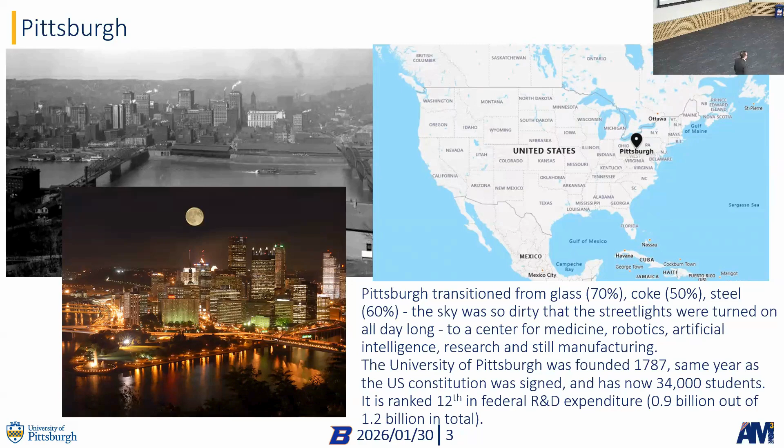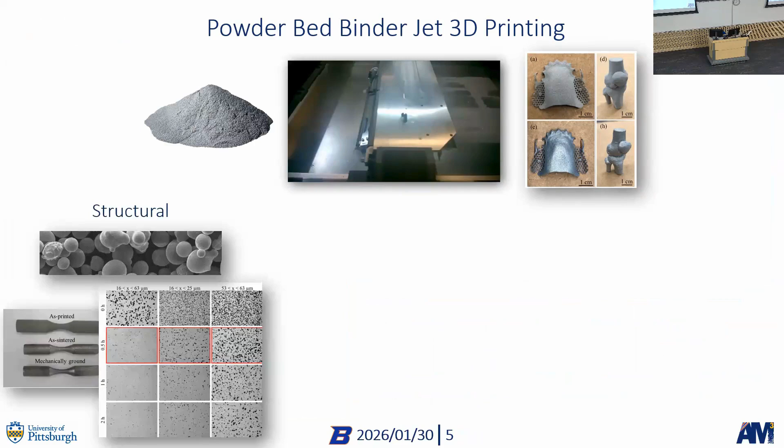Okay, so today in my talk, I will give you a brief overview of Binder Jet 3D printing. I'm splitting that talk up a little bit into structural materials, then I will also talk about functional materials. And finally, I will talk about a project that came out of experiences that we had with binder jetting and some fairly recent occurrences in this country and in the world. That is on porous binder jetted structures.

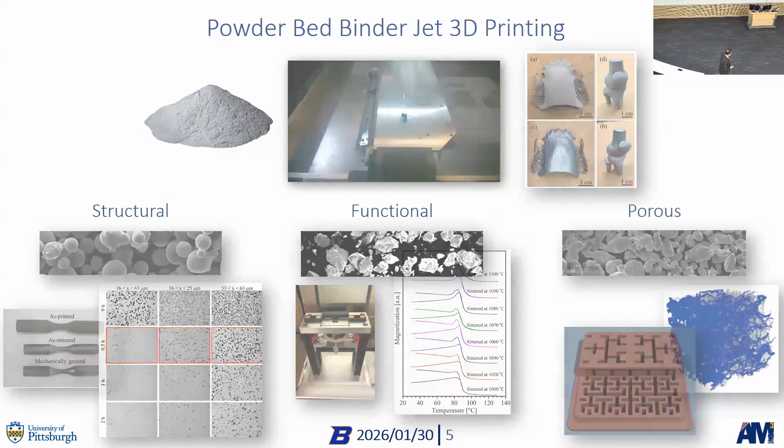So what is binder jet 3D printing, or short binder jetting, right? When you look at the landscape of additive manufacturing, how I like to usually structure and categorize it is: do we have a method that can print metal parts directly, or do these methods only print them indirectly? For example, you make a shape and then pour metal in it or something like that, right?

So when you look at the methods of additive manufacturing, you see VAT polymerization, which is fairly common. You can actually buy these printers now for like $1,000 or something like that. There's material jetting, which you have here in the department. There's material extrusion, which is probably the most common additive manufacturing method for amateurs, right? And that is FDM printers. You can buy them for $150.

And then on the other side, we have directed energy deposition, powder bed fusion, sheet lamination. Those are all methods that can actually print or additively manufacture metal parts. And then there's the odd one in the middle, which is binder jetting. In binder jetting, you can actually print metal parts directly, or you can print sand molds and then use them for sand casting. That is actually the biggest business for binder jetting - printing sand casts.

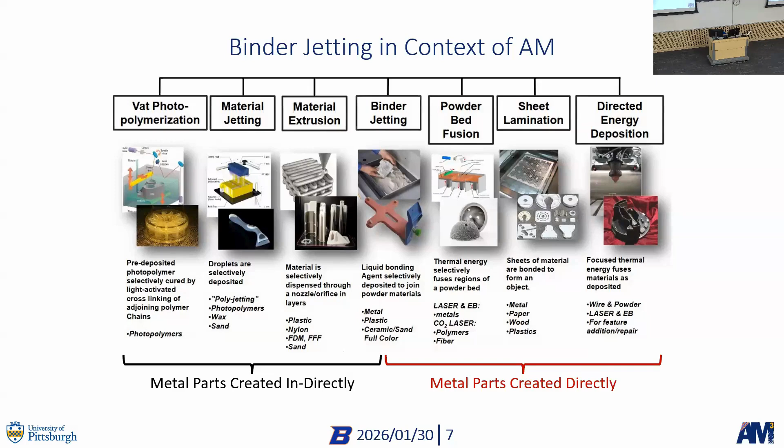Companies that do metal casting actually were able to reduce their development time for parts from a year or two per part redesign to several weeks, right? So it's a huge, huge impact on the metal casting industry.

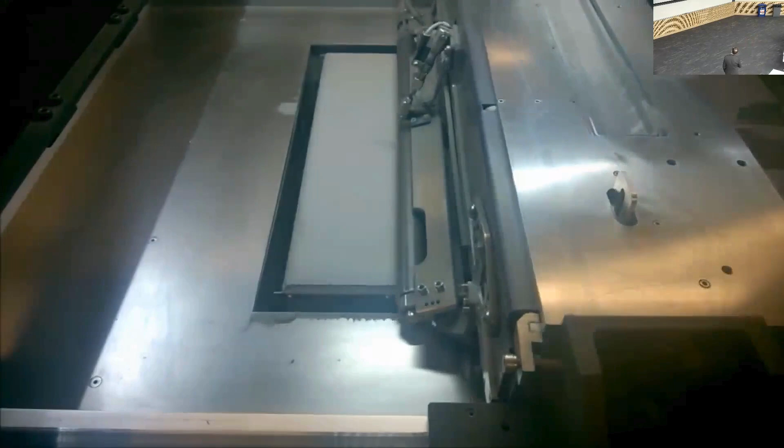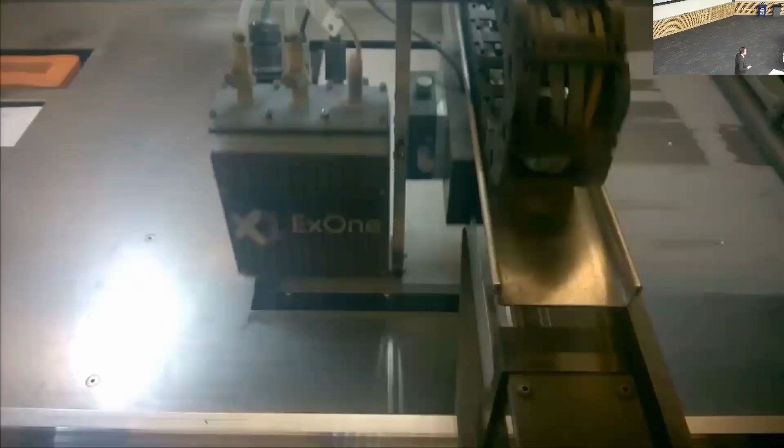So how does binder jetting actually work? What we're doing here is we are laying down a layer of metal powder. We roll it, make it flat. And then in the next step, we are bringing over an inkjet cartridge that you can see here. It's basically like your inkjet printer, but instead of ink, we are printing a glue, right? A binder that is binding particles together in very specific regions that are defined on a 3D model.

And then we are drying this binder briefly to evaporate either a solvent or water, depending on what binder you have. And then after this, you consolidate, you cure the binder and are able to take out your part, and then need to do a high temperature heat treatment.

This high temperature heat treatment is needed because after printing and curing, we have a part that's very chalk-like. So if you have this in your hands, you can actually rub off the powder. It is fairly stable, you can drop it from shallow heights, but the problem is it will just break if you put pressure on it, right?

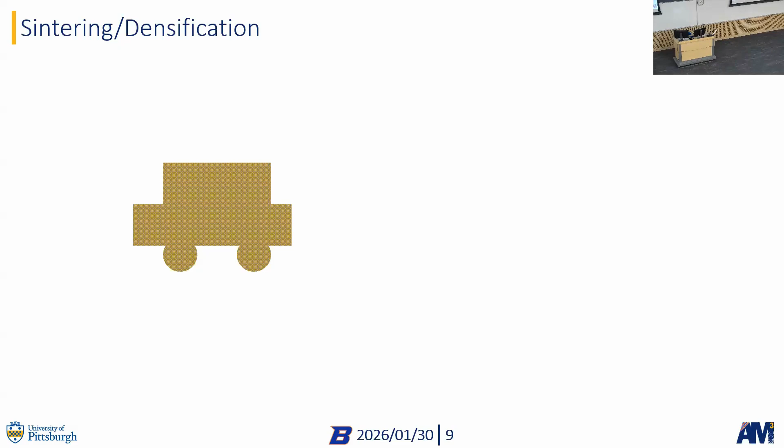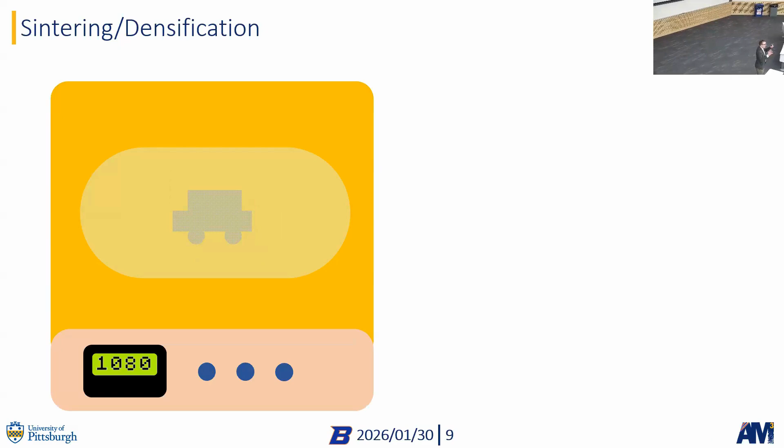So in the high temperature heat treatment, we are applying a temperature that is fairly close to melting point. We densify our material. Since there's a lot of porosity in the as-printed part, it actually shrinks, right? And as I already mentioned, we need to be very close to the liquidus line here to densify quite a bit. But how does this densification actually work?

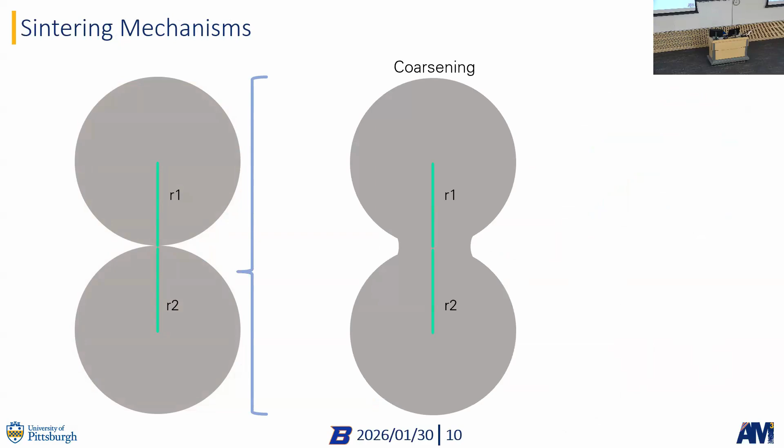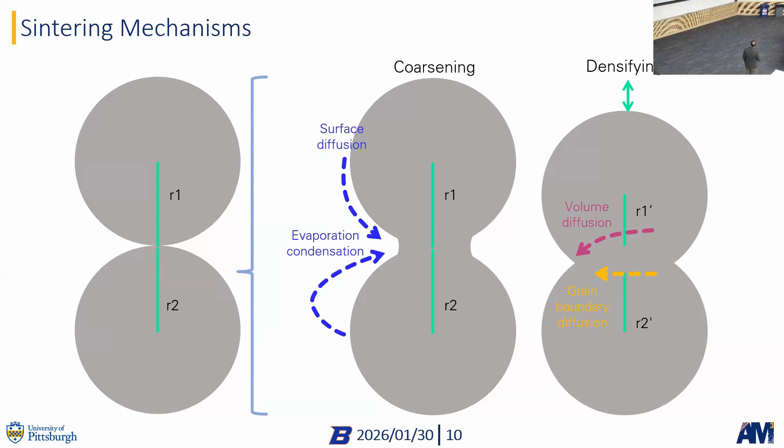So if we're looking at our sintering process, initially we have just powder particles that are next to each other. They are touching a little bit, right? During the sintering process, we first have a coarsening step where we have necking starting between those powder particles, through surface diffusion and evaporation condensation. And then we have the densification step as well, where we have volume diffusion and grain boundary diffusion as the mechanisms of densification.

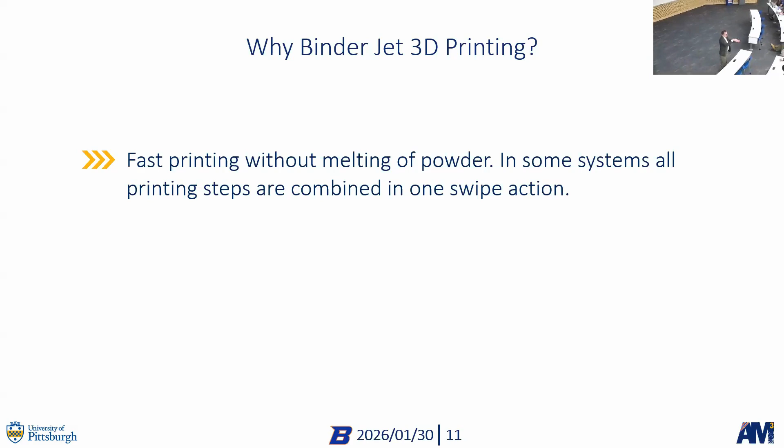So why would we even do binder jet 3D printing? I mean, you need to do this weird sintering process, that's another step, very time consuming. But on the other hand, you can print extremely fast. If you know laser powder bed fusion, you have one laser or maybe two lasers, and it takes a minute or two for each layer to actually print. Here, modern systems can actually do the entire single layer in one swoop. So you have powder deposition, directly behind it printing, and directly behind it drying. So the process is about 100 to 200 times faster than laser powder bed fusion.

We have no residual stresses during printing because there's no melting. That is really good, especially for materials that don't weld well. So if you have materials that don't weld, binder jetting is really something for you. But on the other hand, you need the post-processing - you need sintering for densification. In powder metallurgy, and in Pennsylvania there's a large amount of powder metallurgy companies, you need to do this as well. So this process is actually well understood in the industry, how to densify and sinter things from a powder.

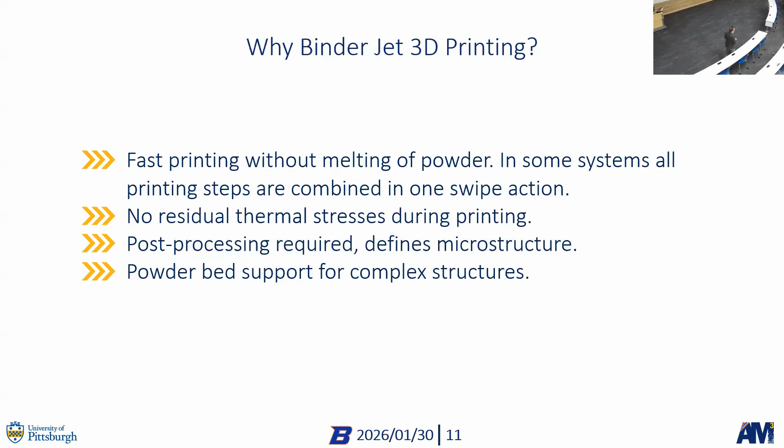And since we have a powder bed throughout the build, we can actually build really complex structures with overhanging parts, flat parts over the entire layer, and they will not sag down or anything during printing, like in laser powder bed fusion, for example.

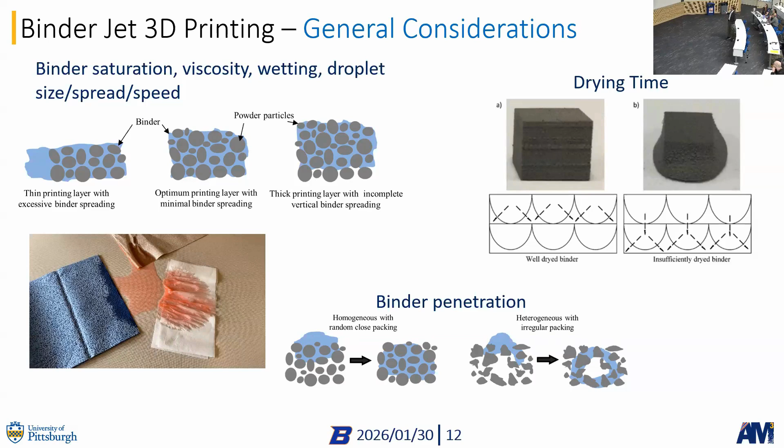So there's a lot that needs to be still considered. Doing binder jet 3D printing, we have an interaction between the powder particles and the binder that you're using to glue these powder particles together. If you look at this little video that I took, this is basically a binder, and here we have different cellulose that you can think of as different powders. What you can see is the binder is seeping into one of these much more than the other two, and that is the same in actually powder. Depending on what kind of powder and binder you have, the powder-binder interaction can be very different. You need to understand how this interaction takes place, how far your binder actually leaks in, whether you'll have nice shapes or binder bleeding in your parts.

You need to consider powder flowability, because if you have very sticky powder, like very fine powdered sugar, then it sticks. If you have granular sugar, then it flows really well. So in binder jetting, it is always better to have flowing powder. You can also get around with non-flowing powder, but that's a different story. You need to look into what is the shape of your powders, does the powder have porosity. And then you need to think about, doing printing, how thick are my layers with respect to maybe the powder size. How fast do I spread the powder? How do I tap it? There's a lot of considerations during the printing aspect as well.

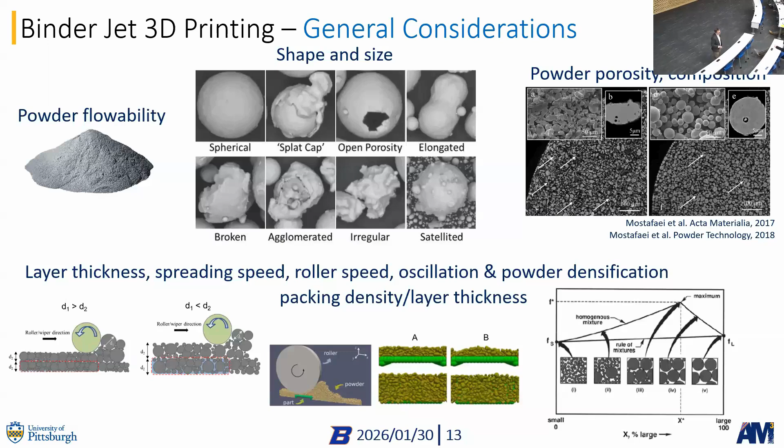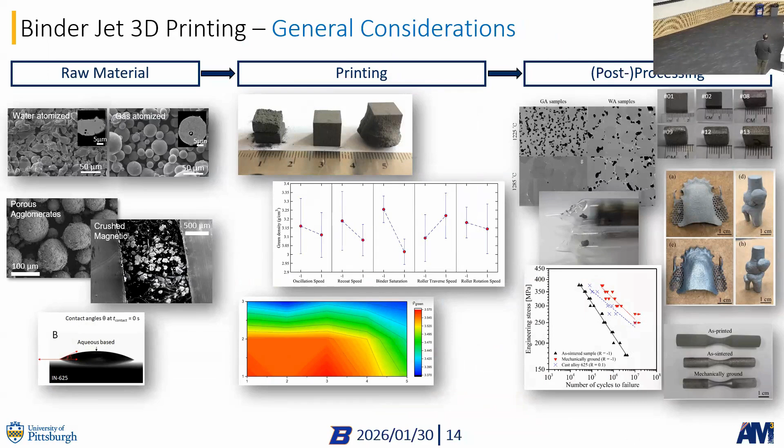So what we learned so far is we need to consider the raw material, powder and binder, and how they interact. We need to print and check how my print parameters affect my printed parts. And then finally, we need to do post-processing, which means sintering and densification.

So now that you're all expert on binder jet 3D printing, I will talk a little bit about structural materials. What do structural materials have in common? What do they need to be usually? They need to be very strong, and in order to be very strong, they need to be fairly dense as well. So for structural materials, that is usually the goal - we want to have very dense materials.

So we started with binder jet 3D printing now over 10 years ago. And the first project that we had was actually looking at, can we use cheaper powder than gas atomized powder? Gas atomized powder is really nice, spherical, flows super well, but it's very expensive. Water atomized powder, not so good - it's not spherical, doesn't flow very well, has contamination and so on. But for industry it's very interesting because it's much cheaper. So we wanted to figure out what's actually the difference between the two, and can we use them in binder jet printing independently?

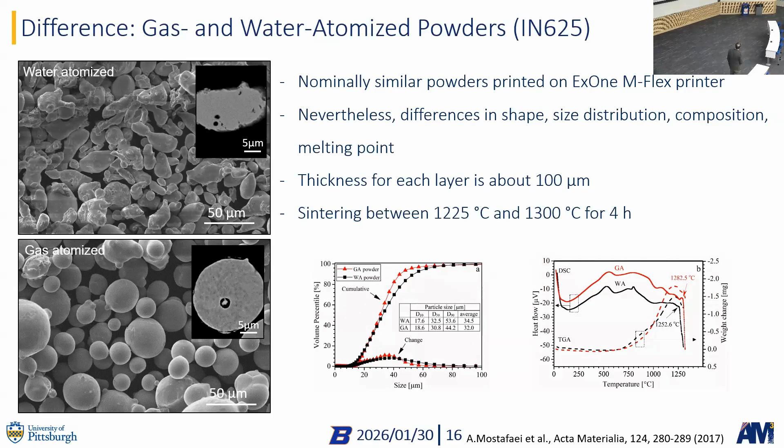So we did a sintering study. We heated our materials up to the same temperatures, and then looked at how they actually densify. So we saw that in gas atomized powder, which is the spherical one, we see really nice densification up to nearly 100%.

In water atomized powders, we didn't see that full densification—we only got to about 95%. What was interesting to me at the time, being extremely naive, is that this translates directly into mechanical properties. At the points where we have highest density, that's where we had the best mechanical properties as well. And even though we might not be fully dense, we can still, after sintering, age our material to change the properties of these metals. We can make them a little harder, increase UTS, which results in less ductility, but we can still modify through aging after sintering.

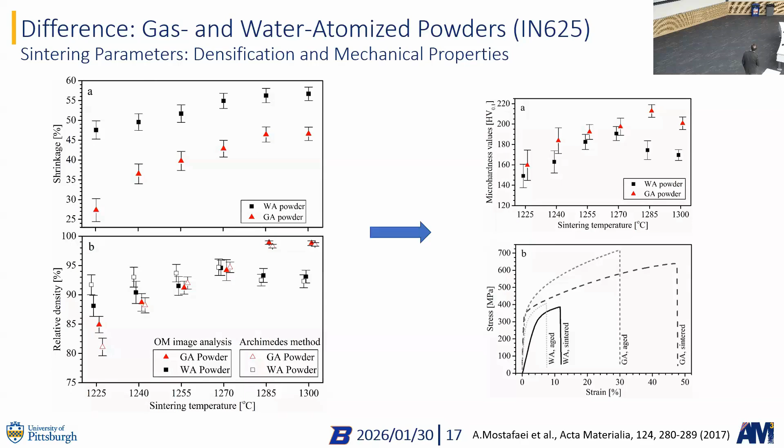As I mentioned, we were very naive in the beginning, so we just followed the printing parameters that the binder jet printer manufacturer gave us for these materials. That's usually a bad idea, okay? Don't do that. It's a good first step, but then you need to actually figure it out yourself.

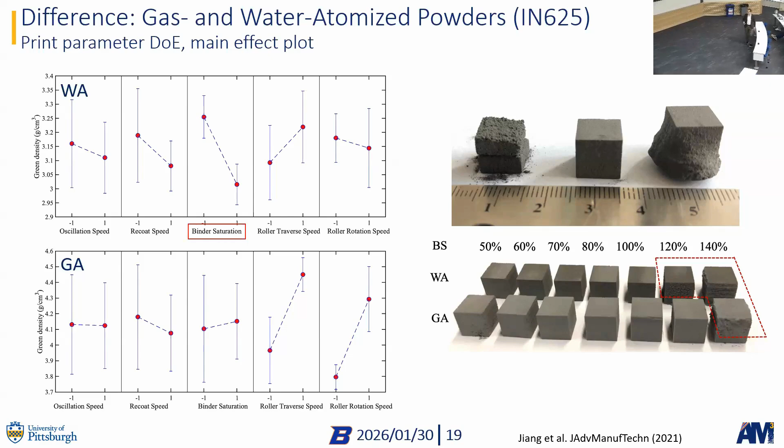So here we looked at the green density, as-printed density, and also density after sintering. What we could see right away is that the green density really translates into the sintered density—the higher your green density, the higher your sintered density. And as we saw before, sintered density also results in the mechanical properties. So whenever our green density was highest, sintered density was highest, mechanical properties were the highest. So what you can learn here is: the better you print your material, the better your final mechanical behavior.

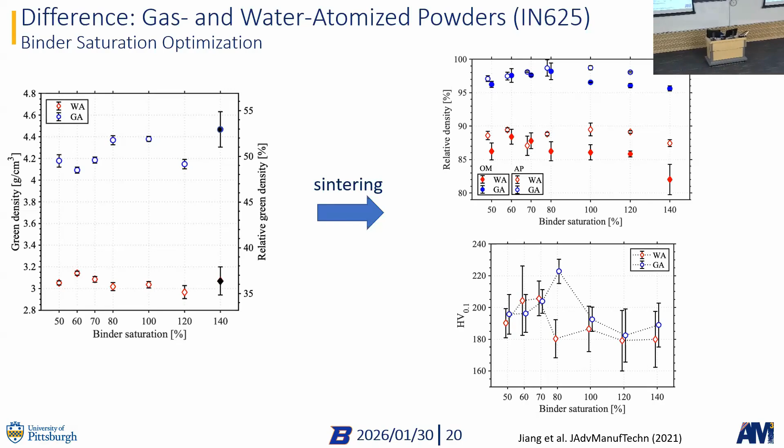So we wanted to learn more. We employed hundreds and hundreds of undergraduate students to cut and polish tens of thousands of samples—well, not that many, but many, many samples across different powder size distributions, different sintering temperatures, and different sintering times. What we wanted to learn is what is actually the densification or sintering mechanism taking place during sintering. With these different sintering times and temperatures, we figured out that at the highest temperature we have grain boundary diffusion, at the intermediate temperature we have volume diffusion and grain boundary diffusion, and at the lowest temperature, the defects are probably affecting densification so much that there's no clear diffusion or densification process present.

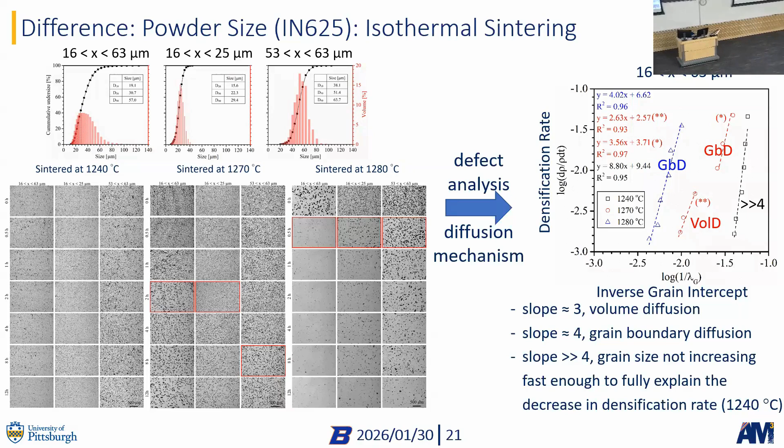So you saw in these previous pictures, if you looked really closely, that there were lines in some of them—these are print defects. If you have a powder, especially a light powder, smaller powder size, maybe lower density powder, then you imprint defects each layer. We wanted to see if this is actually real or just an artifact of the 2D microstructure. So we did microcomputed tomography and saw that no, this is actually real—it's throughout the structure, and this can be a problem. If we need to print small particle powder or light powder, then we need to fix this.

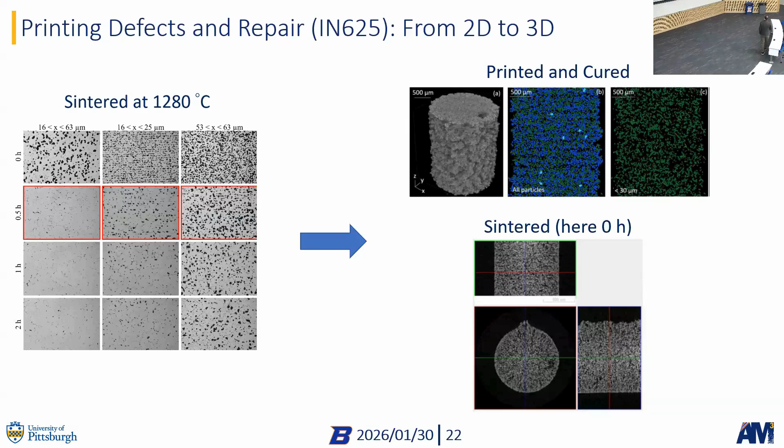So one thing we did is we looked into using supersolidus liquid phase sintering, going just a tick into the region where we have a liquid phase forming. We don't do this very long, just for a brief moment to form this liquid. The liquid is formed on the particles, coating them and helping the densification process quite a bit. By doing so, compared to solid state sintering, we can reach with supersolidus liquid phase sintering in half an hour really dense structures in 3D.

That's a really cool thing because now we basically have a mechanism to repair large defects without distorting the part. We need to be very careful though, because if we go into liquid phase sintering, we just have a blob afterwards. It doesn't matter what you printed, it's literally just a drop. We did this many times when we went a little bit too high. But be careful, find the right temperature, and you can actually repair defects in your printed structures.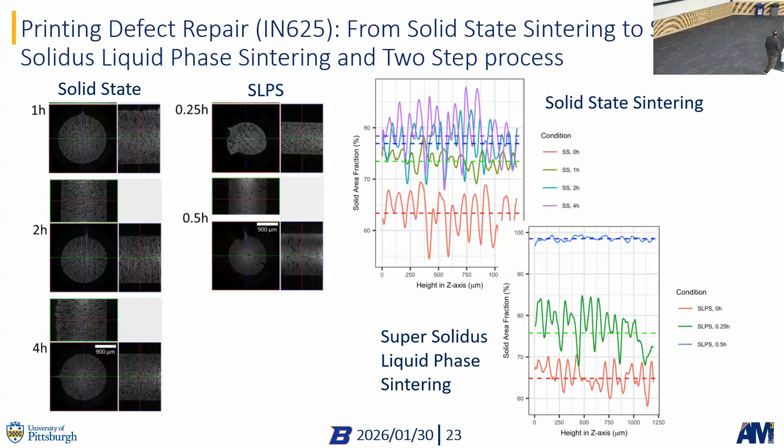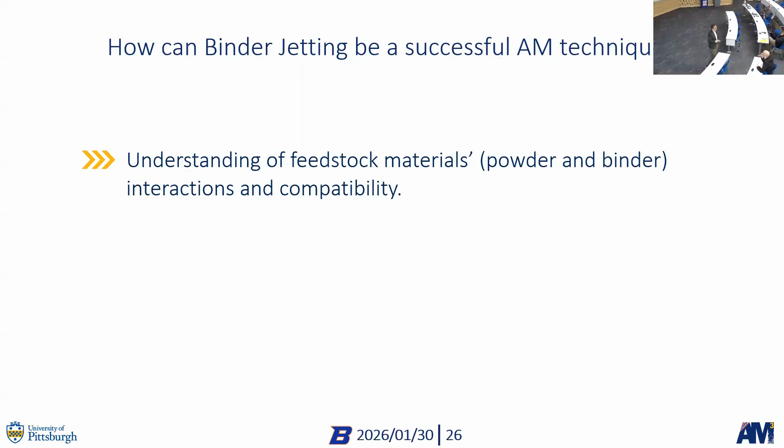So how can binder jetting be a successful additive manufacturing technique? Well, we need to understand the feedstock materials compatibility and interaction, powder and binder. We need to optimize the as-printed green density because that translates into the sinter density and the microstructure. And we also need to optimize the design, because if you have a ginormous part that is all solid, it's very difficult to get the binder out from the center. So you need to design for binder jetting.

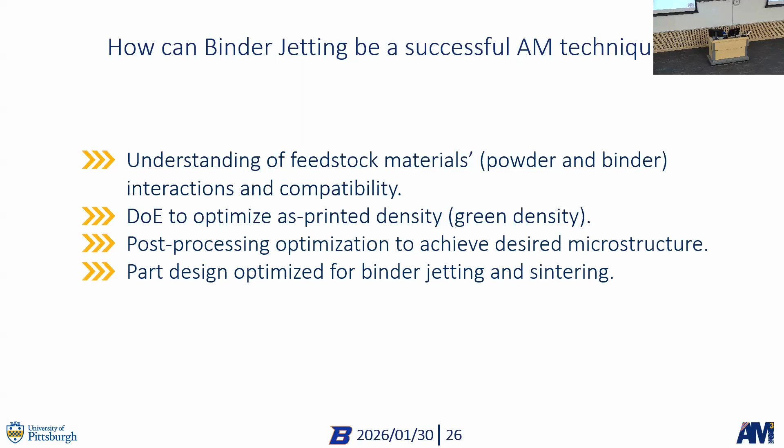Next topic. We're switching around a bit into an area with quite some tradition here at Boise State, magnetic shape memory alloys. This is something I worked on when I came here, and Peter Müllner is one of the main researchers in this field. When I started at Pitt, I was wondering how I could use my knowledge from Boise State and combine it with additive manufacturing.

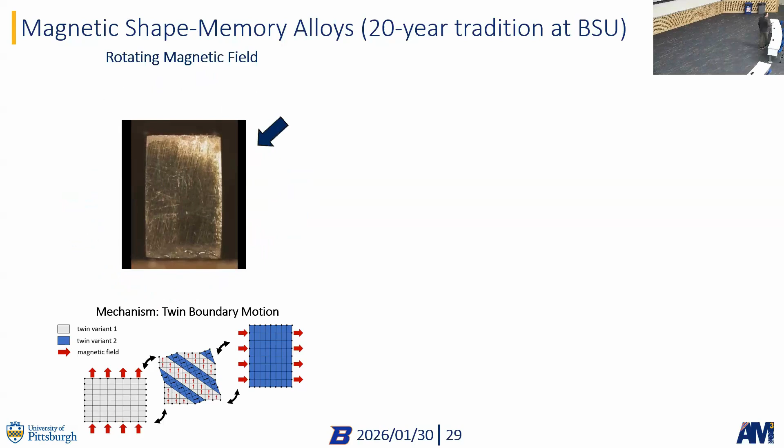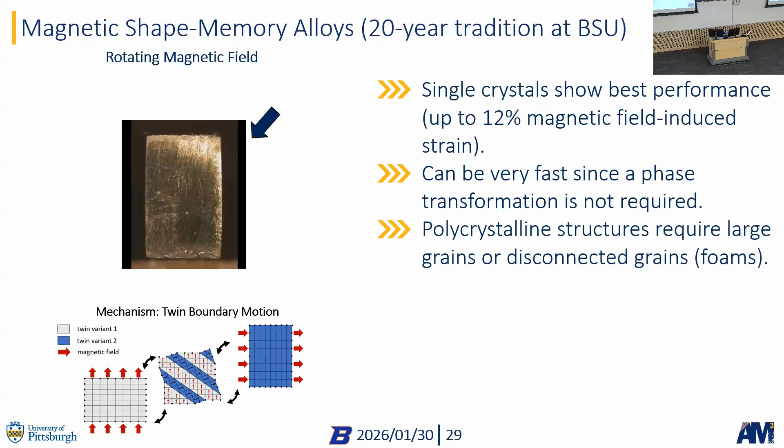As a quick introduction, magnetic shape memory alloys are really cool materials. They're solid and deform up to 12% in a single crystalline state when you apply or change a magnetic field. What's really cool is they perform really fast because they don't need a phase transformation, unlike shape memory alloys that need heating and cooling. As polycrystalline materials, they're terrible though. If you just cast a nickel manganese gallium magnetic shape memory alloy, it will probably not do anything. So you either need very large grains compared to the size of your part, or you need to add porosity and disconnect those grains.

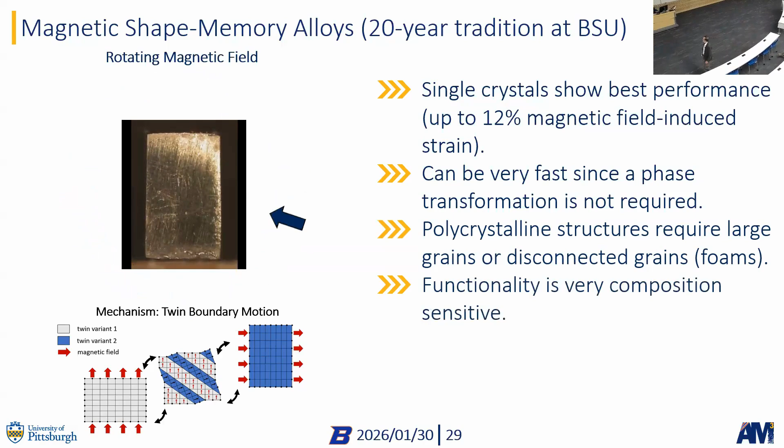So that each grain can act as a single crystal by itself. Another problem is that the functionality is really influenced by the composition, and also really influenced by defects—do you have a rough surface, do you have some other phase in your structure? All of this makes these materials quite difficult to work with. But where there's difficulty, there's always an opportunity.

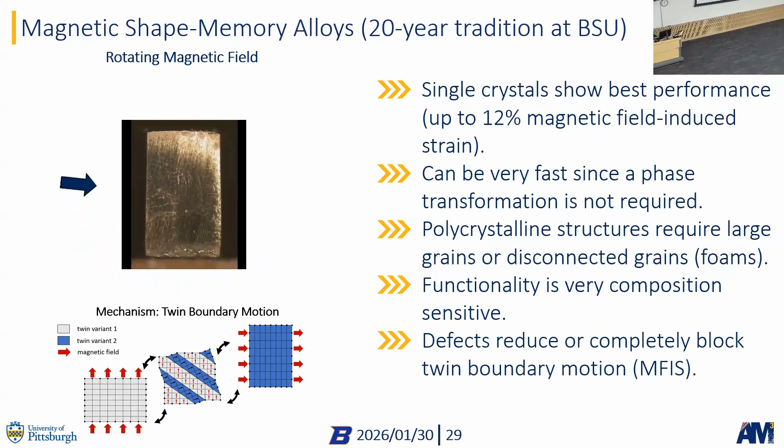So for additive manufacturing, what I really looked at was designing multi-scale porosity. I looked at whether we can actually print very complex shapes, because these materials are fairly brittle, and so when you want to machine them, they can break very easily.

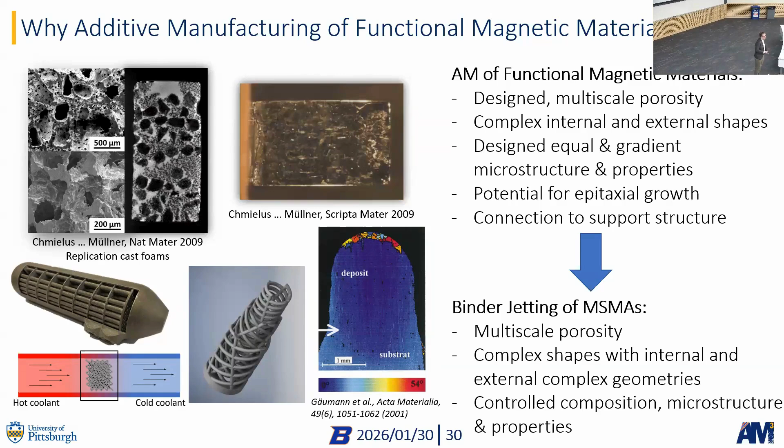Binder jetting, though, is really useful for this porosity and complex shape, and what's really important for us is the controlled composition, microstructure, and properties. That's what I will talk about today, binder jetting of these materials.

So in my lab, we are making powder, characterizing it, potentially post-processing it. We print AM samples, then characterize them, potentially post-process them, and do functional testing.

Yeah, that's a cool Pac-Man, right? Was it one of your samples? I'm not sure—it actually broke while we ran the test, and it looked really cool. A little Pac-Man, love that one.

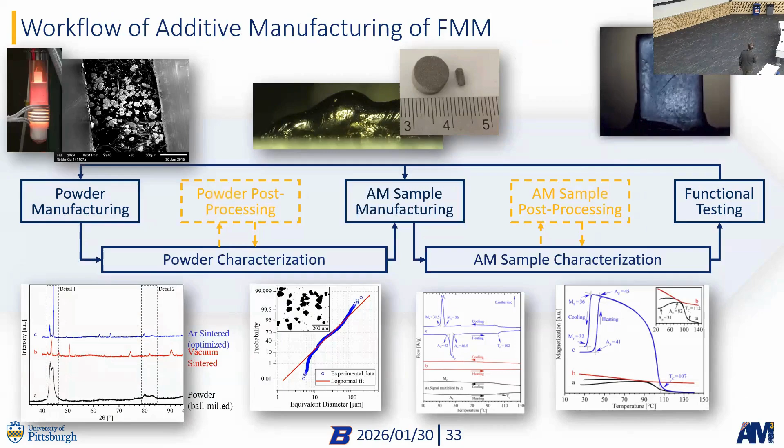So our first test was what kind of sintering atmosphere actually works with nickel manganese gallium. I worked on single crystals, and when we manufactured them, we had a lot of compositional problems, so I was aware there can be issues. We looked at vacuum sintering, and we saw very quickly vacuum sintering does not work at the surfaces.

We have really changes in composition, and those will then result in dramatically changed functionality. On the right side, you see differential scanning calorimetry graphs, which show phase transformations, for example. In vacuum sintered material, you don't see any of them. This is what you should normally see, like martensite phase transformations. Here you see magnetic functionality, and that's also completely gone for our vacuum sintered material.

But if we backfill with argon, our structure looks pretty good. We have twins, which indicate martensites. We also see phase transformations and really good magnetic behavior. So atmosphere plays a big role in these materials.

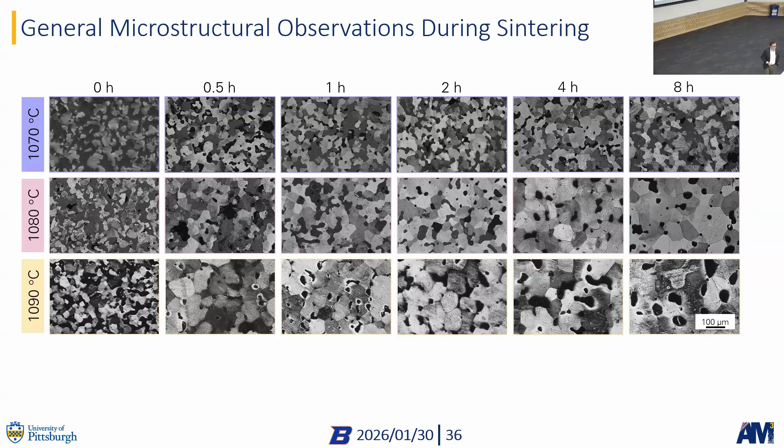Now we wanted to figure out sintering mechanisms again. How can we actually optimize the pore size so that our grains are disconnected, making really large grains at the same time? For that, we again had a lot of undergraduate students in our lab who cut and polished a lot of samples.

What we found is fairly obvious: with increasing temperature, we are increasing density and grain growth. With increasing time of sintering, we are increasing density and grain growth. But one interesting thing was, with increasing time, we saw pore shrinkage. The pores got smaller to some point, and then the pores coalesced again and grew. But we also eliminated some pores.

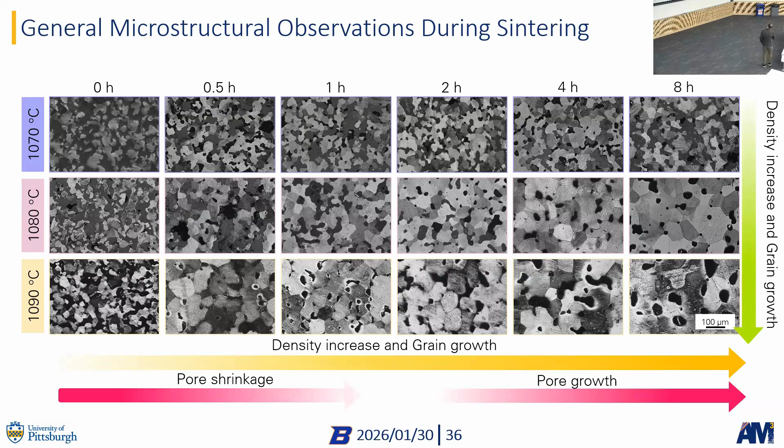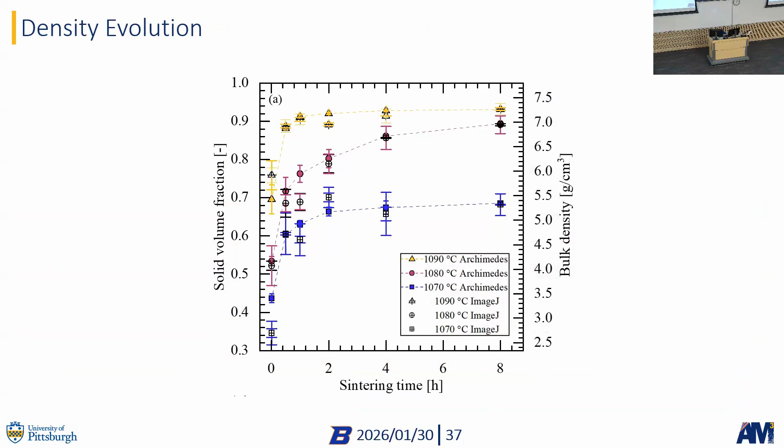So we can use this graph to identify the optimum pore size, optimum grain size for these structures. Here you can see we reached around 93% density for these materials. We use this graph that shows for different sintering temperatures and different sintering times the density of these materials, which we can use to identify densification mechanisms.

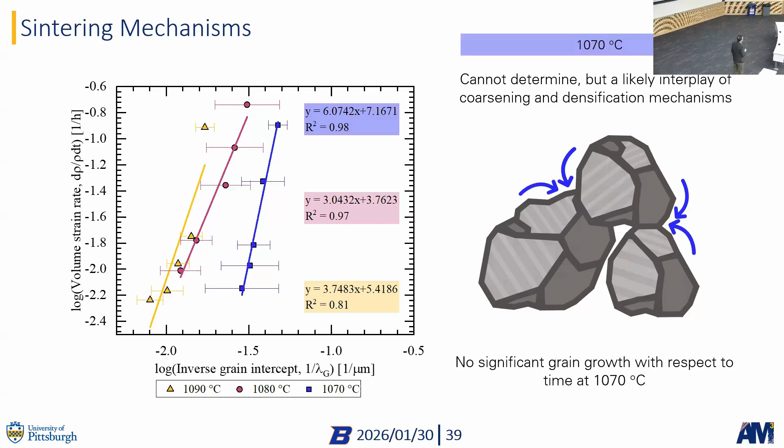So when we go to 1070, which is this line here, the slope in this volume rate versus inverse grain intercept gives you an indication of the densification mechanism. For 1070, the lowest temperature, it's very difficult to identify. Probably we have an interplay of coarsening and densification mechanisms, and we also have a lot of defects that haven't been repaired at this temperature.

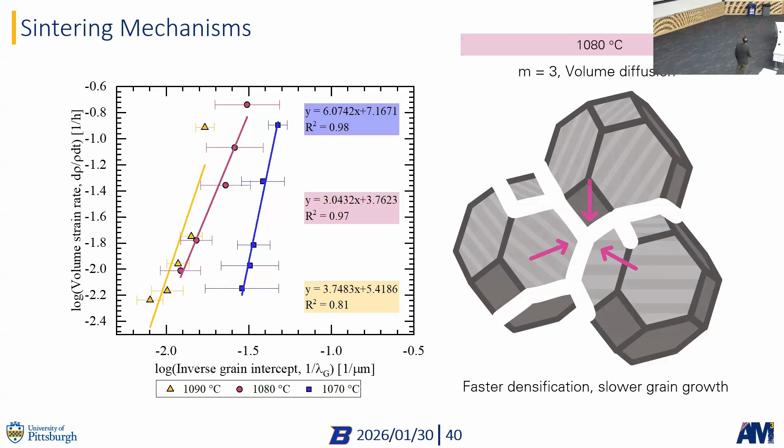For 1080, we do see volume diffusion. This slope here is a 3, which indicates volume diffusion, so we have a faster densification rate, slower grain growth. For high temperatures, we get grain boundary diffusion, which is slower densification rate, faster grain growth, and significant pore rounding. So instead of elongated pores, we see round pores.

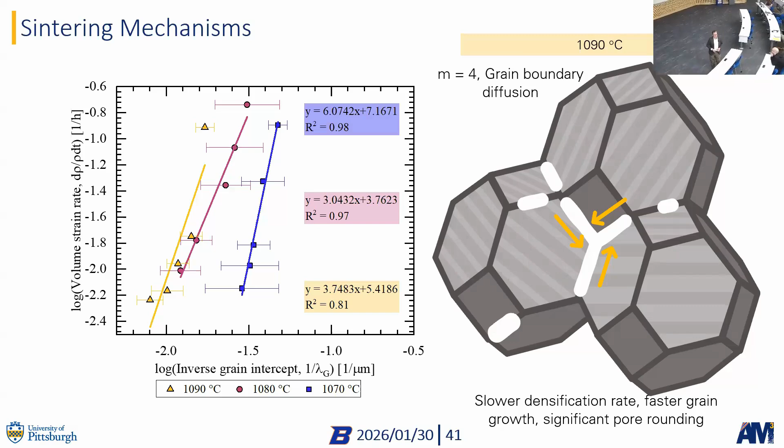So what was really cool about this is all the functional properties that we measured before stayed the same, except for 1100 degrees C. Can anybody imagine why that one was different? 1100 C. Anybody wants to take a guess?

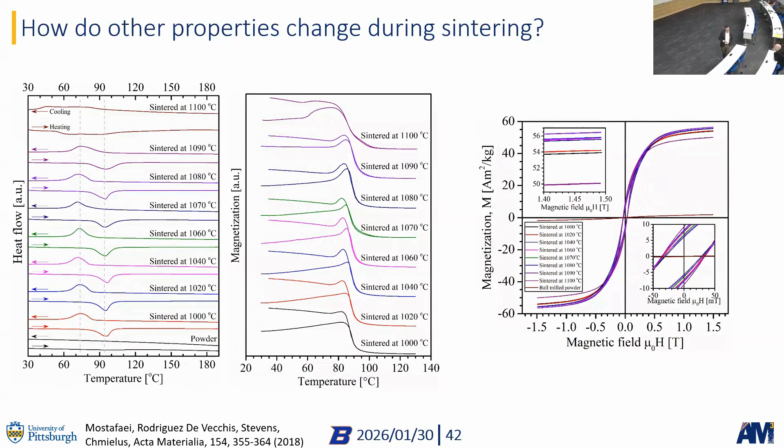But the cool thing is all the other temperatures, all the other times resulted in the same functional magnetic and phase transformation properties. And that's great because now we can really just focus on our pore microstructure. So are we done with binder jetting? We understand the sintering kinetics a little bit better.

But we still have oxides, so you couldn't really see it, but even in argon backfilled sintering, we still have oxide layers, and they're detrimental to functionality. Also, the grains are disconnected, but they are still randomly oriented. So we want to get as close to a single crystal as possible, if we can, because that would increase functionality. If you remember, magnetic shape memory alloys function best as single crystals.

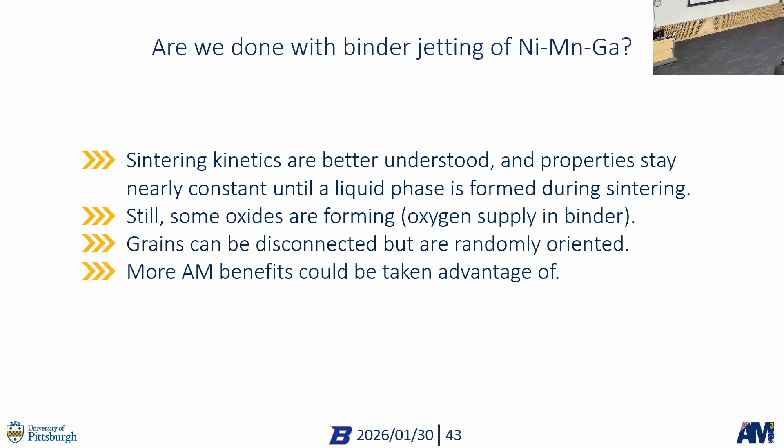And then we haven't really taken advantage of additive manufacturing too much here, right? We could just compact these materials as well. So one of my students, the next 2 slides took 5 years, just mentioning that. So this was an oxidation study because one of my students really wanted to figure out what is actually going on in these materials.

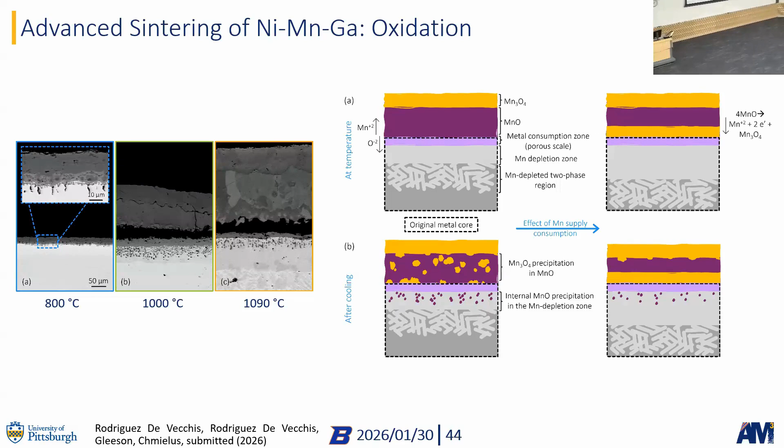We found that we are forming manganese oxides in various forms. There will be 2 papers coming out this year where you can read all about it, but I don't have enough time today to talk about it. What was really cool though is what she also figured out while just trying to figure out what kind of oxides are forming.

She used a very classic method of a Rhines pack that creates an oxygen partial pressure in an encapsulation tube to eliminate oxidation completely. This is a really cool result. When you look at binder in vacuum versus binder in manganese oxide, there is no oxygen, or very, very little. Now we have a mechanism to sinter nickel-manganese-gallium without any oxidation, with binder present. That's really cool because we eliminate contamination now.

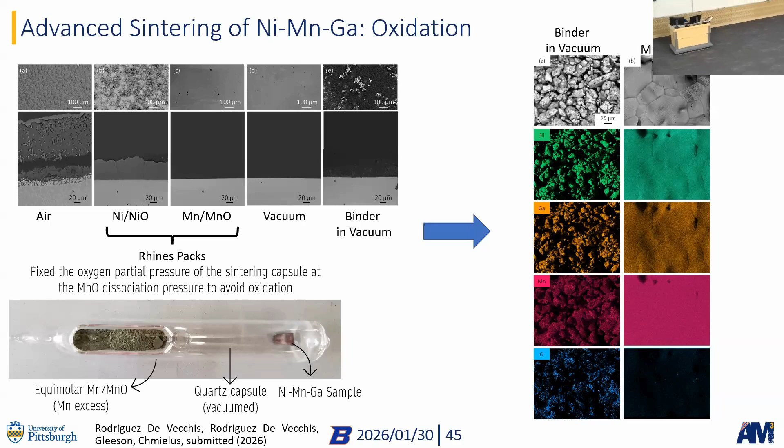We have a really cool pore microstructure. We know how we can modify this, and we keep our functional properties, magnetic properties, and phase transformations constant over these times and temperatures. So very cool results. As I said, 5 years, right? Just 2 slides.

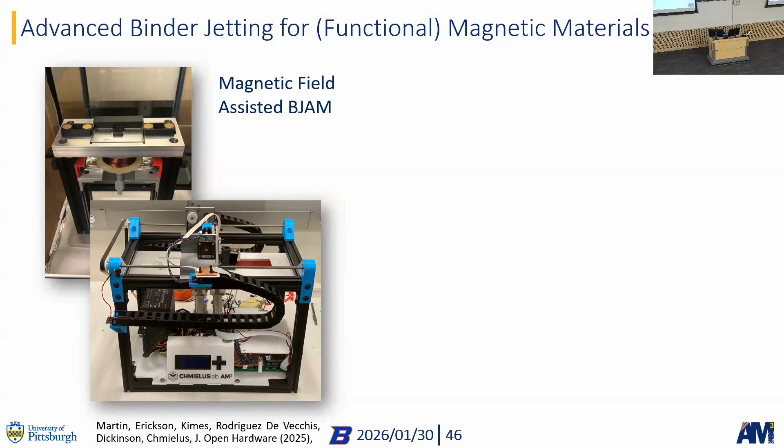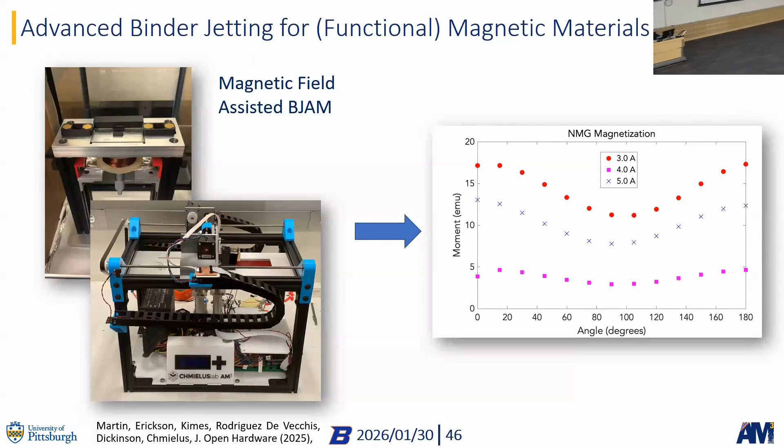And then we can also print multi-materials in binder jetting with our custom printers. Those are super useful if you want to combine certain behaviors of functional materials. Maybe you want a material that deforms on one side and is cooled on the other side - a magnetocaloric material on one side, a magnetic shape memory alloy on the other. Or maybe you have a structural material on one side and the functional on the other. This is really cool, and we're working on all of this currently as well.

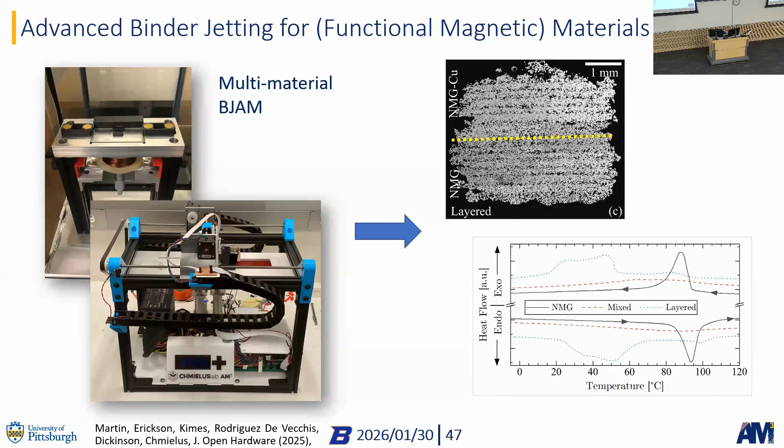Okay, how much time do I have left? 10 minutes. Okay, now we're coming to another cool project.

So here we are now taking advantage of the disadvantages of binder jet printing. If you have something bad, just make it a good thing. So the motivation for this was actually...

COVID-19. During COVID-19, you all remember you had to clear the labs, run away, stay at home. Directly the first week in, I got a call from a friend of mine who works at the University of Pittsburgh Medical Center. She said, we are out of face shields, we don't have disinfectants anymore, we don't have masks, and we're running through them - we're getting them in and they're gone within a day. So can you help us?

In the engineering school, we had just received 20 small FDM printers the week before the shutdown, by chance, including tons of material. So we started building face shields, holders for face shields for them, and we started doing all kinds of other things for our local hospitals. We also thought, well, there's a lot of companies around the area that might want to help too, and they actually did want to help. So local hospitals needed help, companies wanted help, and we were in the middle of this, because everybody contacted the universities. So we formed a collaboration with several companies in the area, powder manufacturers, additive manufacturing companies, and us.

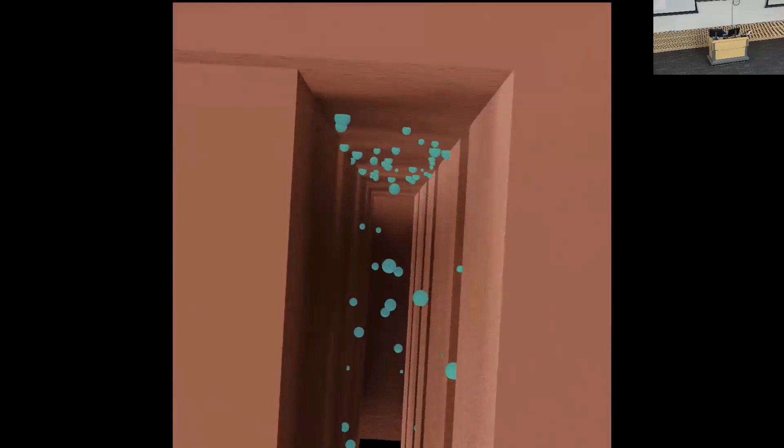We started to work on a project that had tons of energy and tons of naivety. We were really excited and had no idea what we were doing - that's always a great combination. Our idea was to build a filter made out of metal that you don't throw away, that is self-sterilizing. We're using copper, we're using high surface area material by making all these channels thin, and we make them porous because binder jetting is porous already. So we don't need to worry about densification anymore - we now keep it porous.

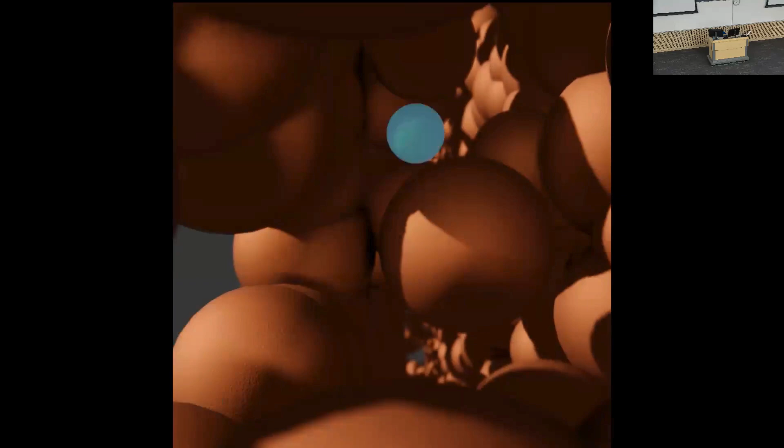Once a droplet with COVID-19 hits copper, it would die within 10 to 15 minutes. Copper is very antiviral, antibacterial. The cool thing is a clinician or a nurse can wear these, put them on their desk at night, and the next morning it's sterile again. They don't need to do anything, they can just reuse it again. That was the idea, okay.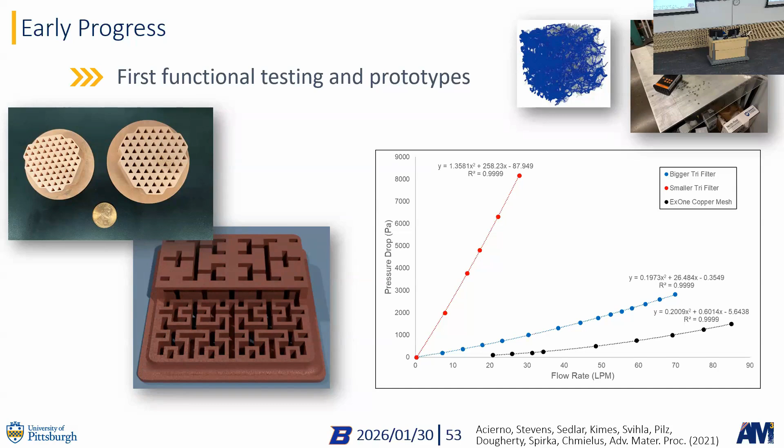So first we need to figure out how we can actually print copper. Copper oxidizes so easily, it's unbearable. Even just curing the material to cure the binder already oxidized the entire structure. So we took advantage of that.

Again, taking advantage of the bad thing. So we were debinding under air, completely oxidizing the material, but then using hydrogen to densify. Hydrogen can get rid of the oxide on the surface, and we can fully densify these copper structures using just a little bit of hydrogen, 5%. In industry, that is actually done, but under 100% hydrogen, which we were a little bit wary of, so we didn't want to do that, but 5% is actually fine.

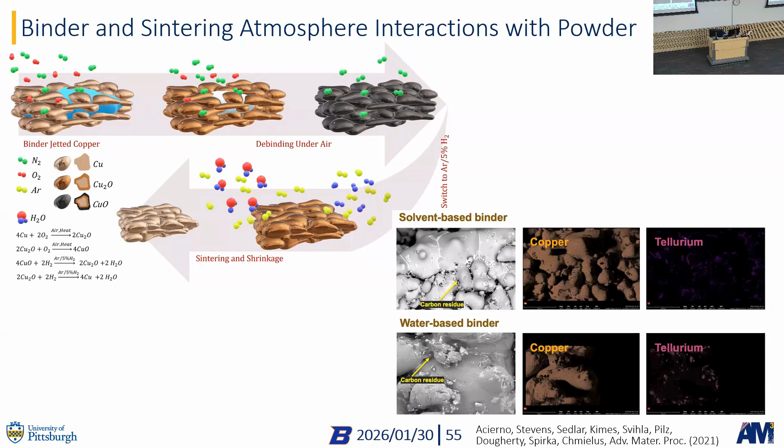We also looked at the binder and figured out we used the wrong binder from the start. A different binder resulted in much less carbon and oxygen contamination.

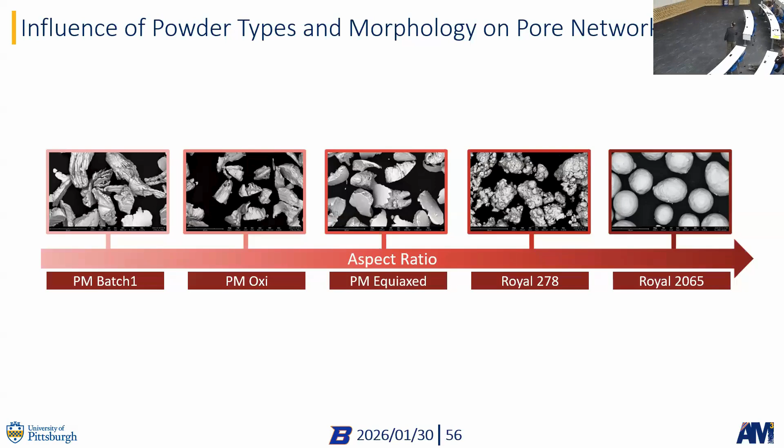We also thought, well, the gas atomized powder is again very expensive. So let's work with some local manufacturers of powder and actually get super cheap powder. These powders here are actually machine powder, basically chips coming from a lathe. So super chunky powder, and we tried all kinds of aspect ratios, from super chunky to spherical.

We also added space holders to our materials to add extra space, extra porosity. And then we looked at how the amount of space holders affects the microstructure for each of these different powders that we got. You see, we got a large variety of microstructures, and that will result in a large variety of pressure drops, of capture efficiency—how much particles are actually getting captured—and the quality of these filters.

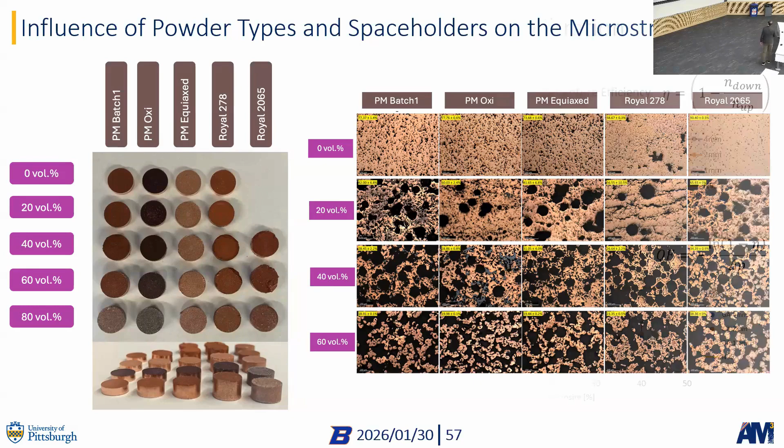We are getting very close to N95 material for pressure drop—pressure drop is how easy it is to breathe through these materials. So we're nearly getting there, while capture efficiency is pretty high. In these more dense materials, we're very, very high, better than N95 material.

Quality factor is not that good yet, at least not for these materials, because we haven't tested higher porosities yet, and we haven't tested the space holder materials yet either. But this is very good data, and Sam, if you see this on YouTube, I hope it only gets better.

So we reach pressure drops and capture efficiencies that are comparable to N95 masks. The quality factor is still a little bit lower, but hopefully with the higher porosity materials, we actually see exactly what we need to have.

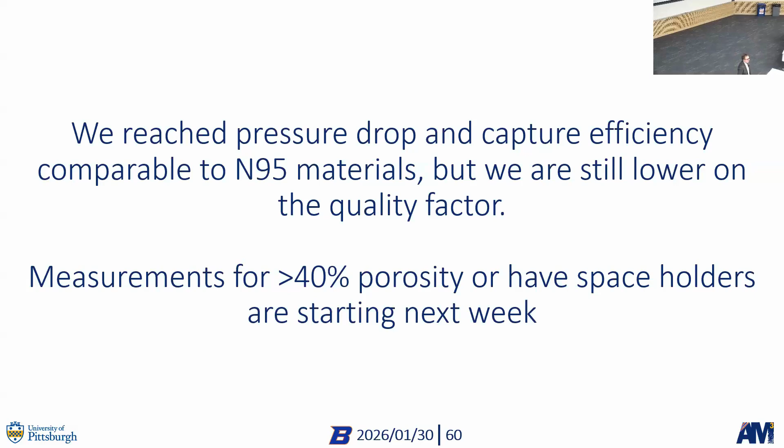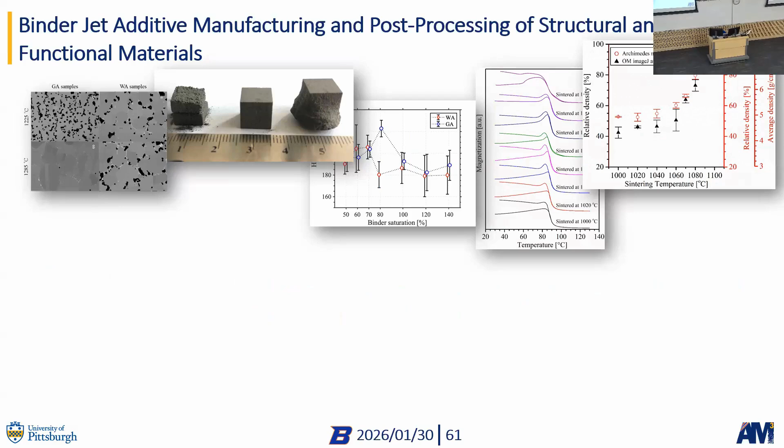We're nearly done. I hope I showed you that binder jetting is really a cool method of additive manufacturing, where you can actually look at the powder, sintering, printing, and come up with a structure that is what you need—for a porous project, for a solid project, for functional materials.

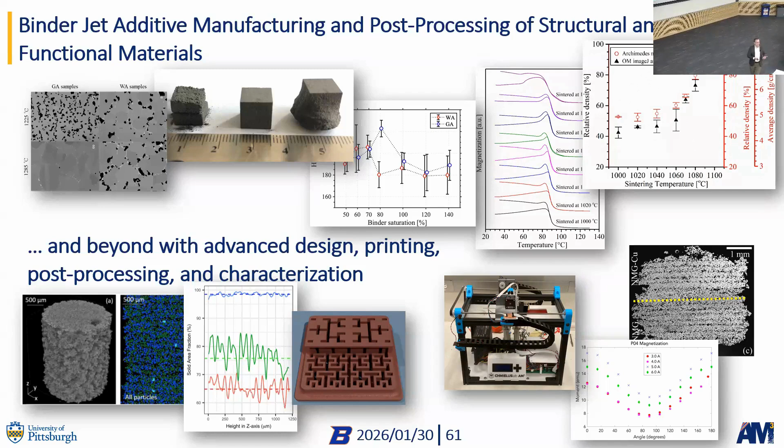And I hope I also showed you that when you use advanced methods, you can go even further—you can now use magnetic fields, you can do multi-material printing, you can look in 3D at how those structures look like, and you can repair defects as well. So really, really cool things.